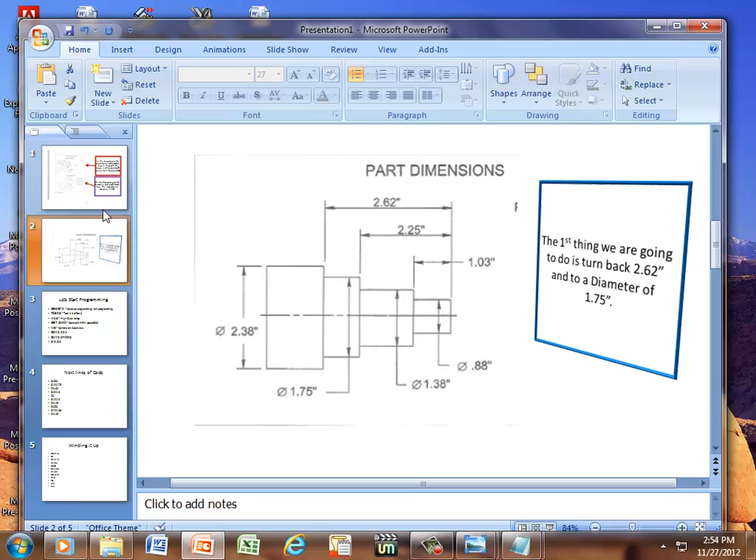Okay, this is going to be an example of running a lathe CNC program, and here is what it's going to look like. Here we have the description of the turning at the top and the dimensions at the bottom. I have a little small PowerPoint here to explain a little bit about it.

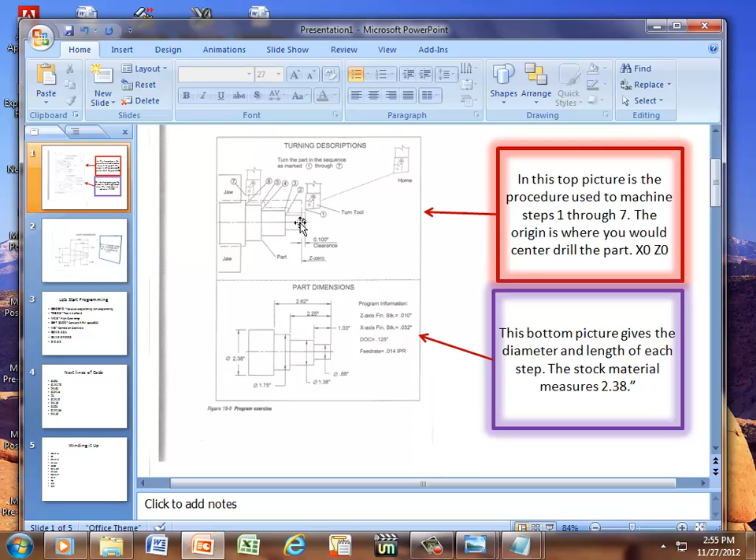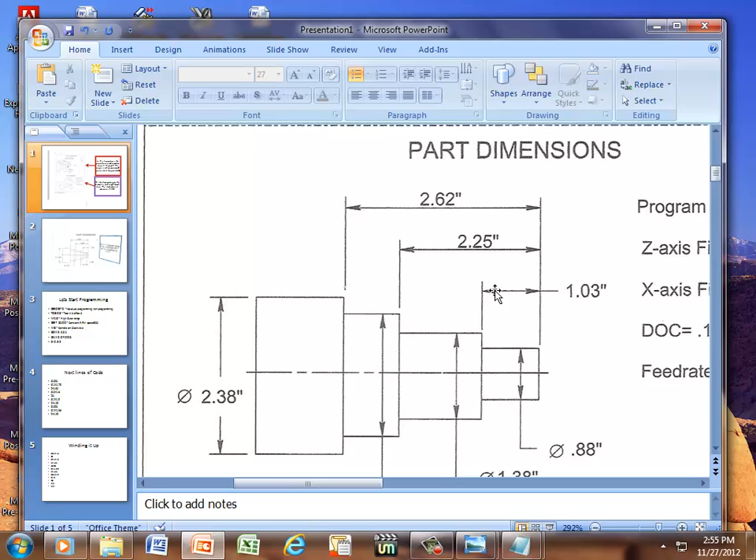In the top picture is the procedure used to machine steps 1 through 7. The origin, that's actually where we measure everything from, and this is where you would normally center drill your part. Let me zoom in on this just a little bit tighter. And it's this area right here. So we're going to be going from step 1, 2, right on up through step 7. The bottom here is our dimensions. I'll zoom back down to here.

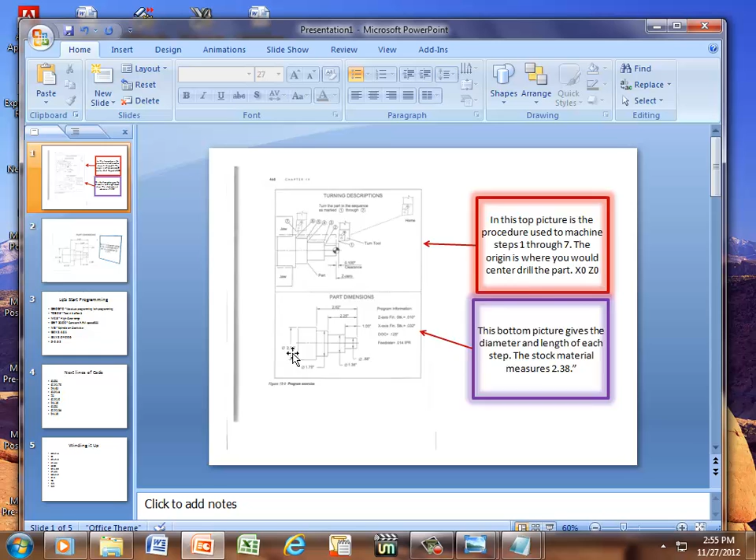So the first thing we're going to do is we're going to turn back to our length of 2.62 and a diameter of 1.75. Our stock material is 2.38. Here's where we start. This is our stock material, and we're going to turn it back to 2.62. And here's our diameter. That's the very first thing we're going to do.

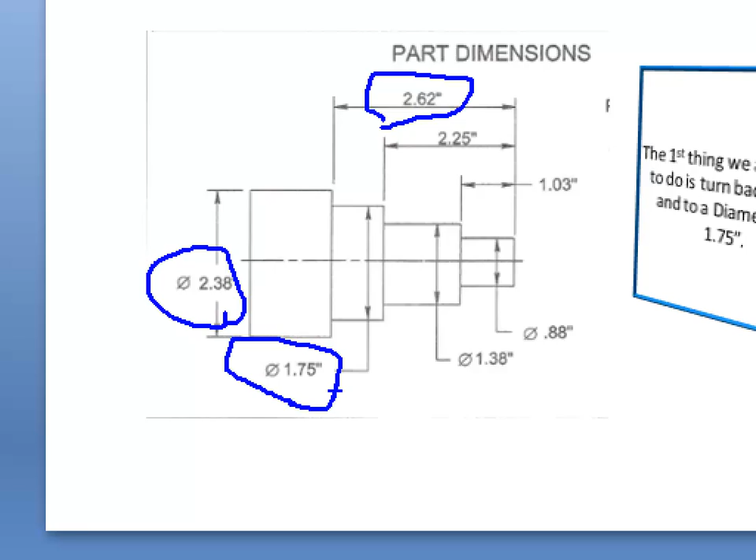The next step is starting to write the program, I guess. We can start off with a G90, which is absolute programming, and a G70, which is inch programming. The tool number 3, an offset 3, is how we would describe that. T03, which is tool 3, and the other 03 is offset 3.

We have to tell it what gear range we're going to be in. We have a M41, M42, and M43, M43 being our high gear range. The G97 is constant RPMs, and our speed or our RPMs is 500. The next thing we're going to do is turn our spindle on. We're going to turn it on in a clockwise direction, and then we're going to position ourselves.

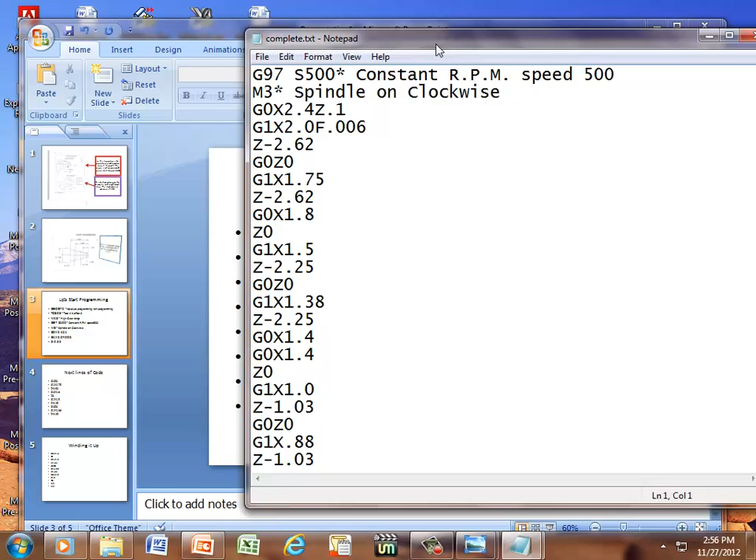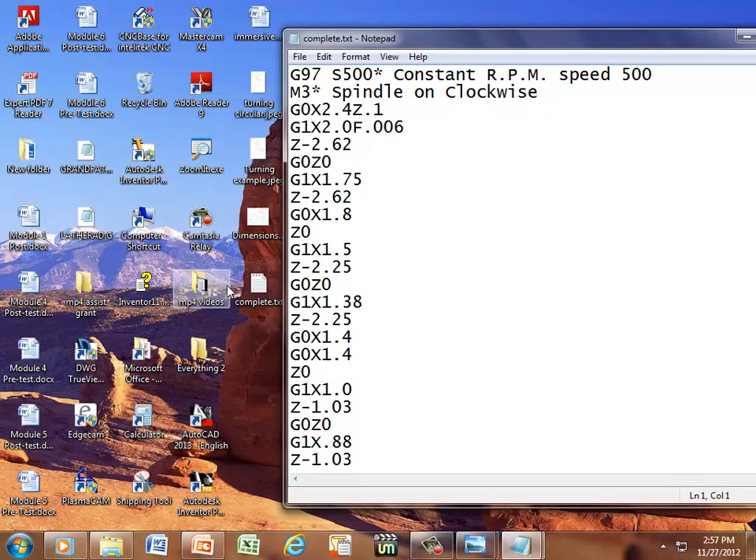So in order to do that, let's see here if I can pull this up. Here's the code, and minimize that, and let's pull this up as well. Actually, I think I would rather have this one. Alright, now we have our program before us and our dimensions. So we positioned ourselves at a diameter of 1 3/4 and a length of minus 2.62.

Here's where we come in at the Z minus 2.62, and we took it to a diameter of 1.75. Here's how far back we turned it, and then we're going to go to 1.8 because I backed off of that surface because I did not want to scrape it. And the next thing we did is we went back to the 0 point in our Z-axis.

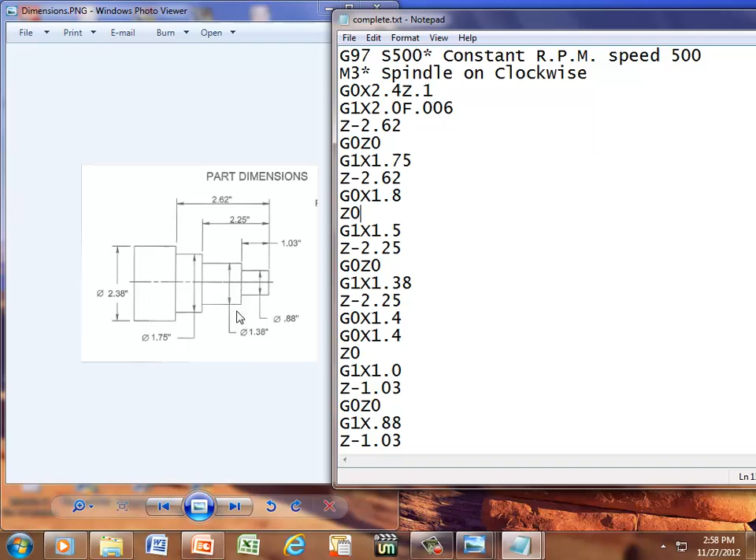The next thing we're going to do is we're going to zoom in on this a little bit tighter. We're going to a length of 2 1/4 and a diameter of 1.38. And here's where we come in with the negative Z minus 2 1/4. And then we wrapped it back to the beginning, and we took it to a diameter of 1.38. Then we finished the cutout at Z minus 2.25.

We backed off the surface at 1.4. Notice I did it twice so we can get rid of one of these. And we wrapped it back to Z0, which is this line here. And now we're going to take it to a length of 1.03, and we're going to a diameter of 880 thousandths of an inch. Clear this.

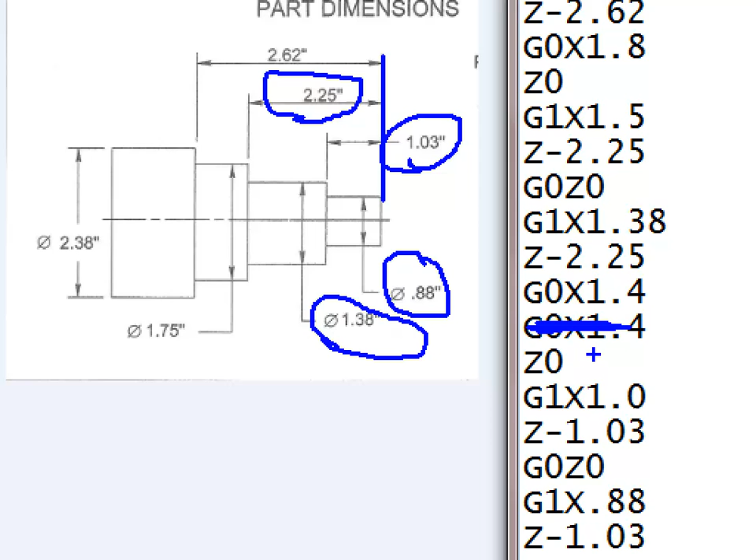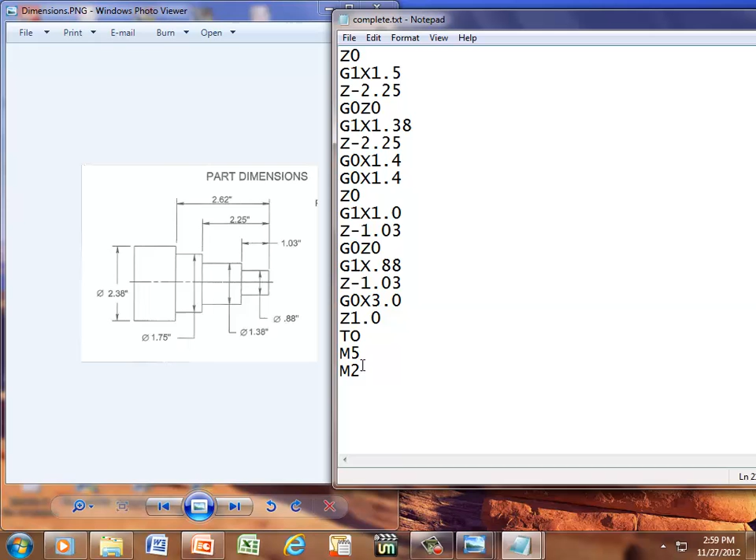Okay, now that we're down to this diameter and to this length, the last thing to do is to pull it back out to a diameter of 3 inches in the X-axis, and Z 1 inch in the Z. T0 cancels our offset, M5 turns the spindle off, and M2 ends the program.

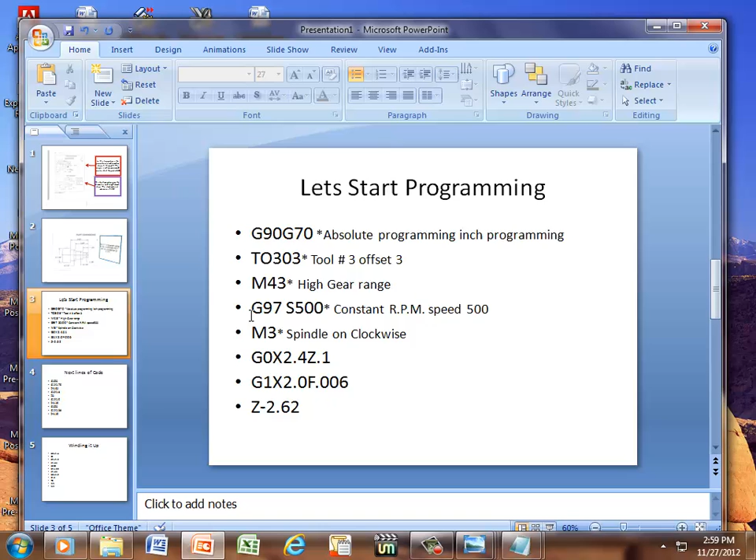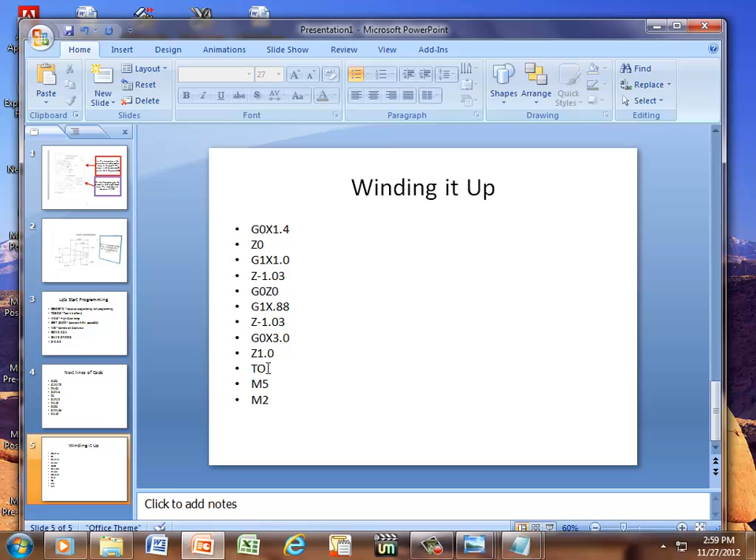And so I can pull this PowerPoint back up. Here's where we started the program. Our next line of code continues on, and we wind it up with the rest of the program. However, I see right here where it says TO, that is the letter O. It should be a 0.

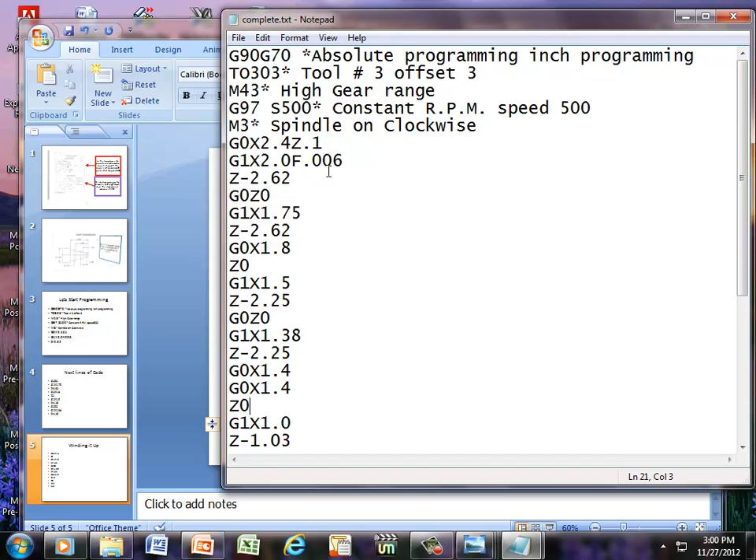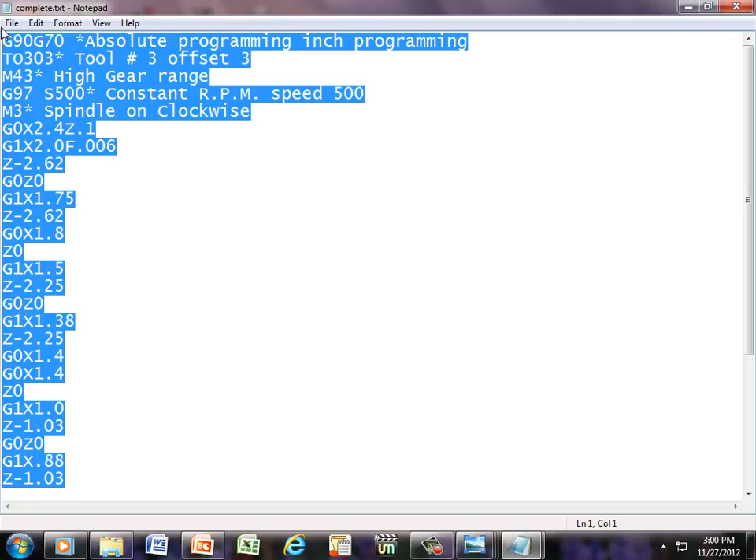Here is the complete code. It's got some text right here telling you what everything is. And we can scroll through that. I can maximize this, and I'm going to reduce the font size to maybe a 16 so we can get it all on the same page. And there's your program.